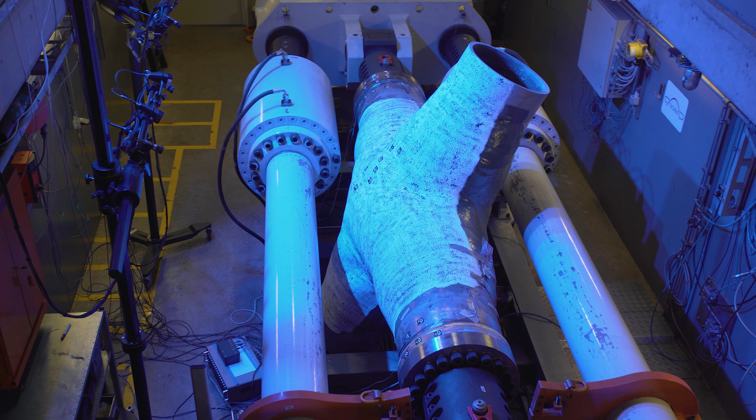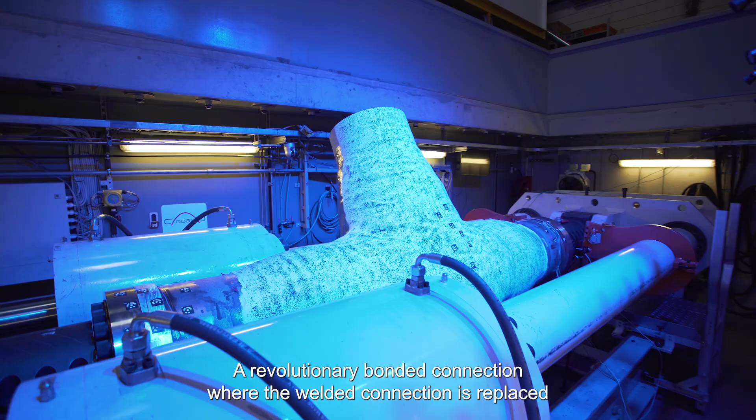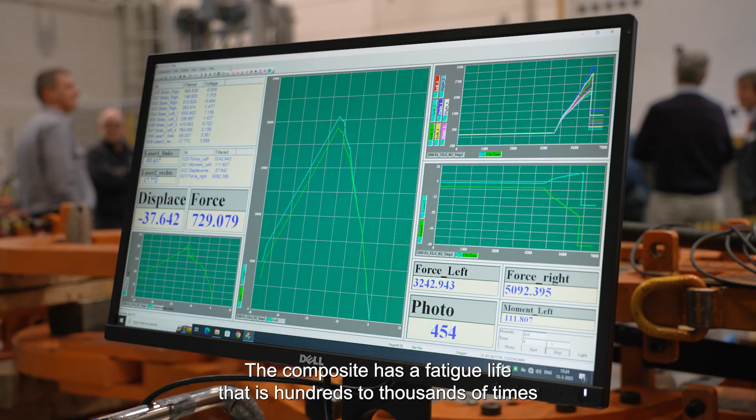The WrapNode is the next big innovation when it comes to offshore wind, solar and ocean energy structures. A revolutionary bonded connection where the welded connection is replaced by wrapping flexible and durable composite material around steel tubes. The composite has a fatigue life that is hundreds to thousands of times longer than steel equivalents. It will accelerate the construction process of tubular structures, like offshore wind turbine foundations, thereby helping to speed up the energy transition.

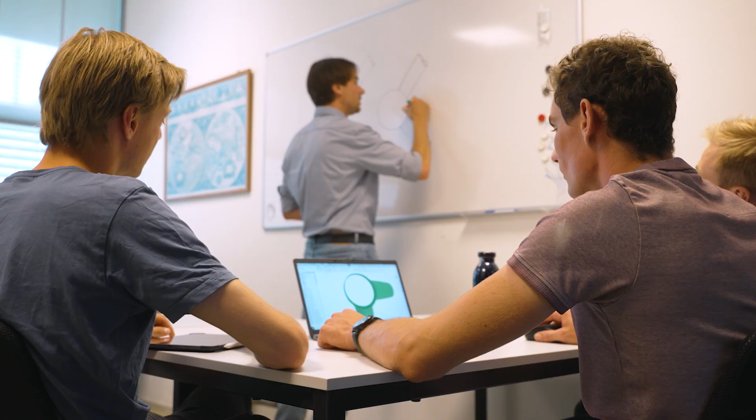In this video, the researchers and engineers on our team would like to tell their stories, from the conception of the idea to the development and extensive testing of this joining technology, and of course the progress of the WrapNode and how it will evolve from this point on.

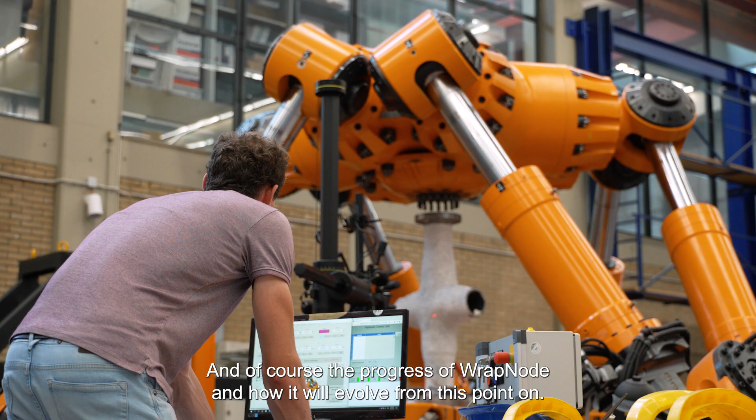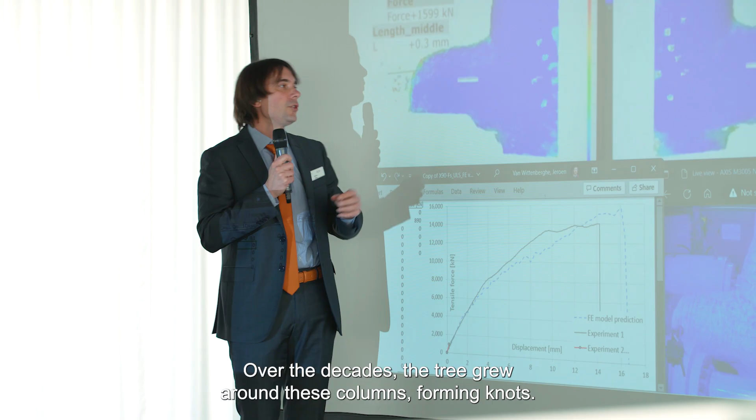The inspiration for the WrapNode comes from Belgrade, a beautiful town where I spent many years. There is one large tree with very long branches, which people have supported with steel columns to help it grow even further. Over the decades, the tree grew around these columns, forming knots, a natural connection between the branches and the steel tubes.

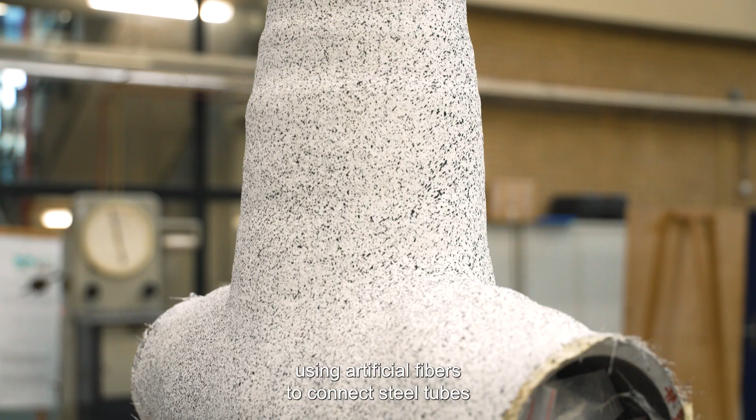The tree did this in the most optimal shape, leading to smooth transfer of stresses. Since a tree is made of natural fibers, the idea came to me to create a similar connection using artificial fibers to connect steel tubes in huge man-made structures.

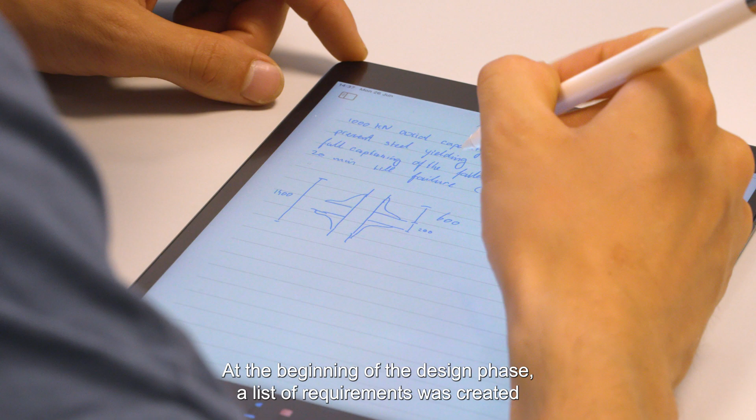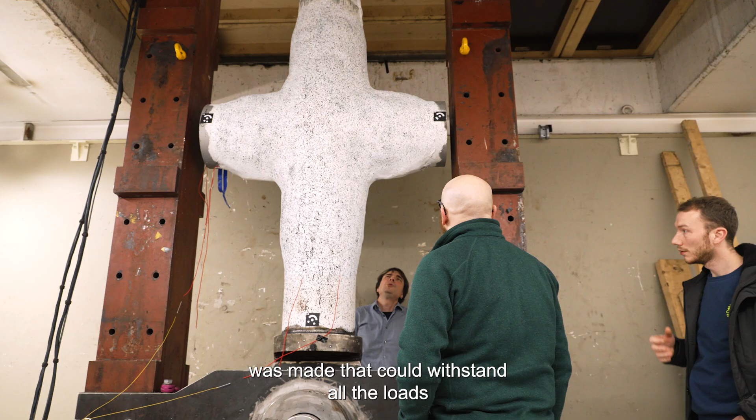So we started designing a WrapNode that can connect steel tubes in a structure supporting a wind turbine offshore. At the beginning of the design phase, a list of requirements was created, describing things like water depth, turbine type and environmental conditions. In an iterative process, a design of the structure and joints was made that could withstand all the loads and meet the requirements of an operational wind turbine.

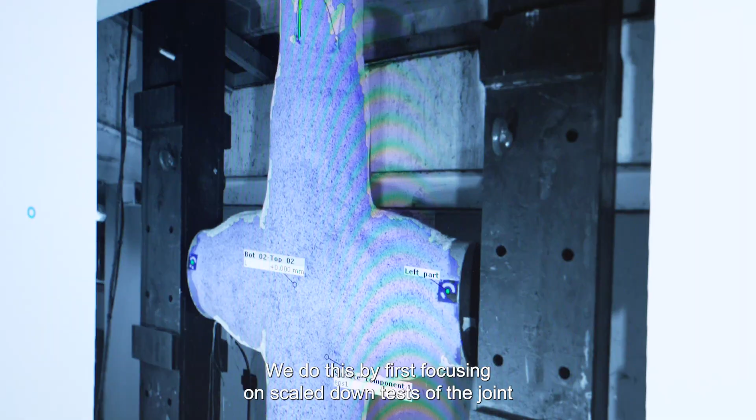We of course want to validate the performance of our design. We do this by first focusing on scaled-down tests of the joint and using these results to calibrate our models. The validated models will become an efficient and powerful tool to simulate the joint behavior, allowing us to predict the performance of other geometries, orientations and dimensions for the WrapNodes.

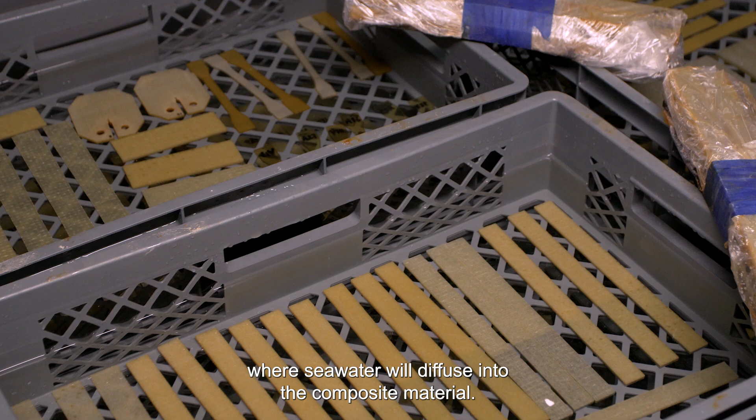The WrapNodes must withstand offshore environmental conditions, where seawater will diffuse into the composite material. The presence of moisture degrades the material and the steel composite bonded interface. In addition, temperature changes will affect the mechanical behavior of the material and must also be considered in the design of the structure.

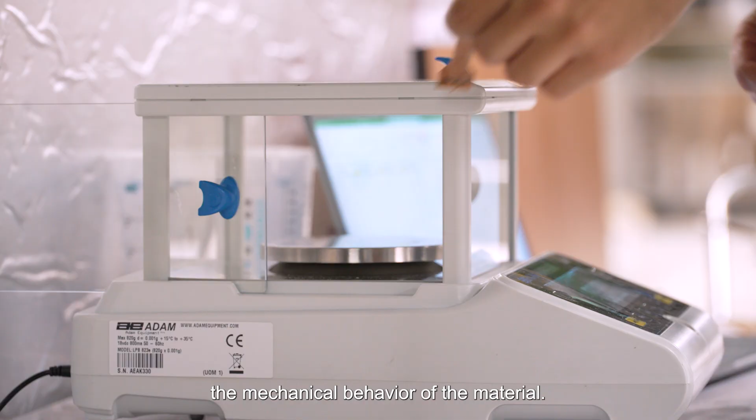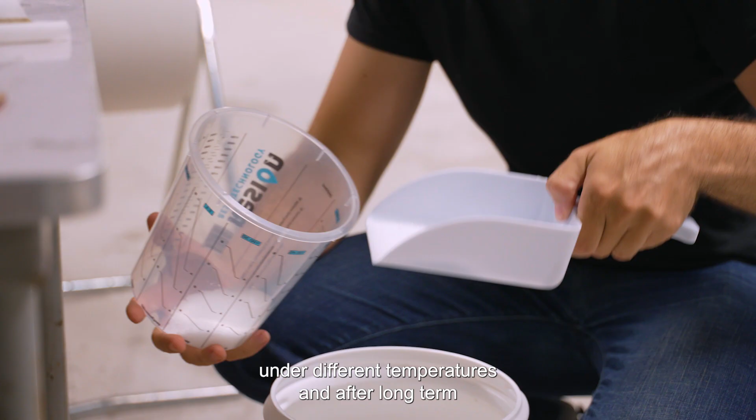For this reason, tests are performed on material and bonding samples under different temperatures and after long-term immersion in salt water. Experimental results are modeled into computational tools to consider the effect of environmental parameters on the performance of the structure.

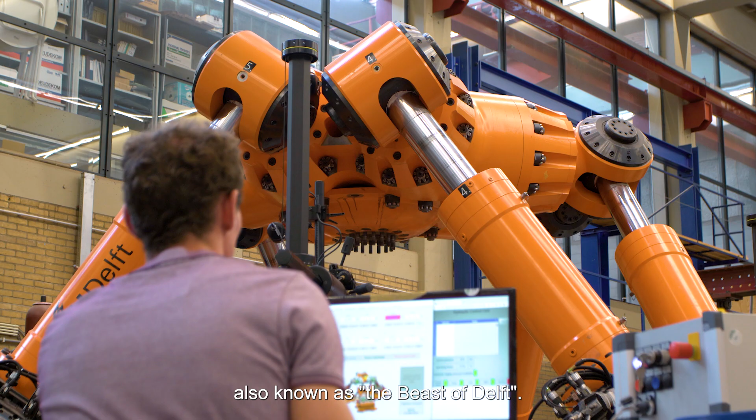WrapNodes come in different forms of geometrical and load complexities. To understand this, we look into complex and simple geometries. Simple geometries, X-joints in different load directions and combinations, are tested in the hexapod, also known as the Beast of Delft. By performing all those experiments, we want to establish a solid understanding of the joint behavior and prediction models when the WrapNode is subject to multi-axial load conditions.

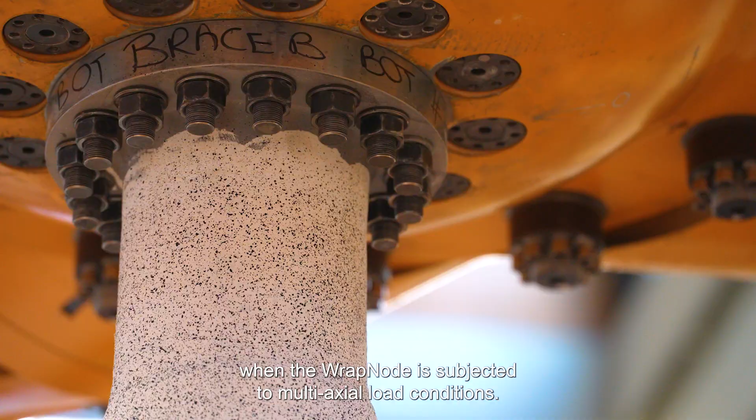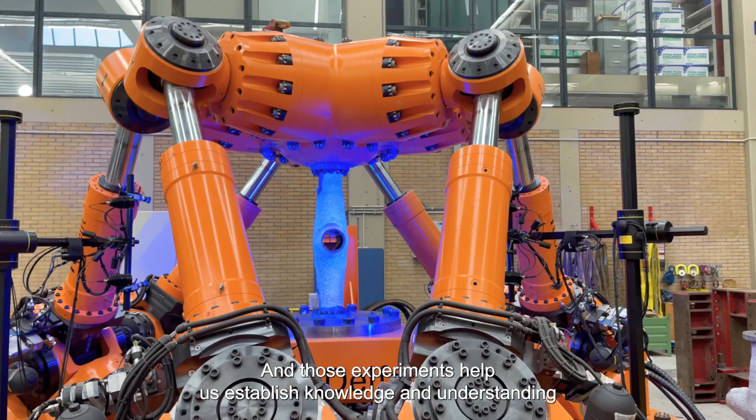We are also looking into complex geometries by testing KK joints. Those joints connect the diagonals with the leg in the supporting structure. Those experiments help us establish knowledge and understanding to develop prediction models that can quantify the static and cyclic resistance of the WrapNode.

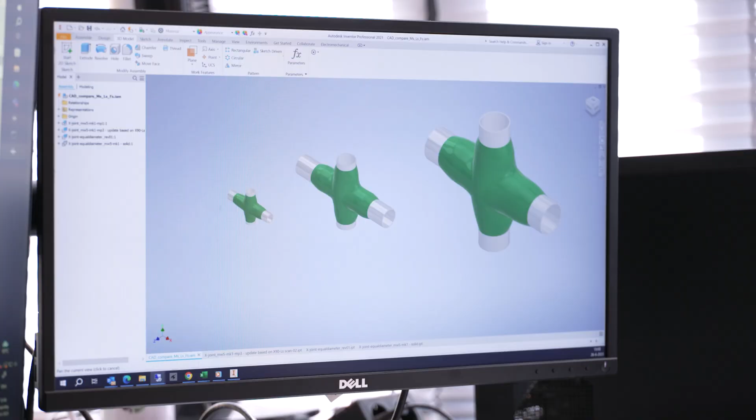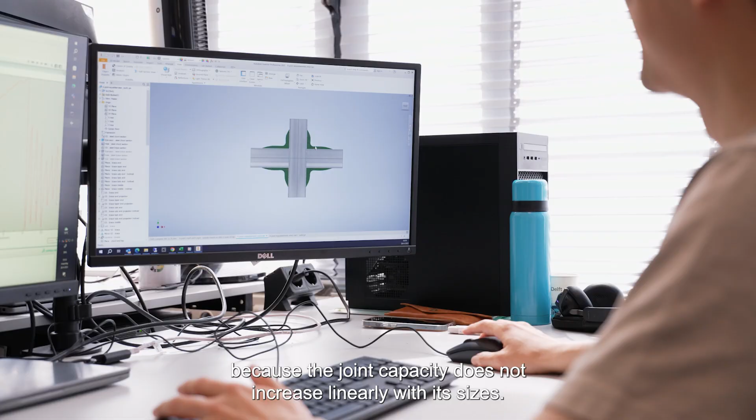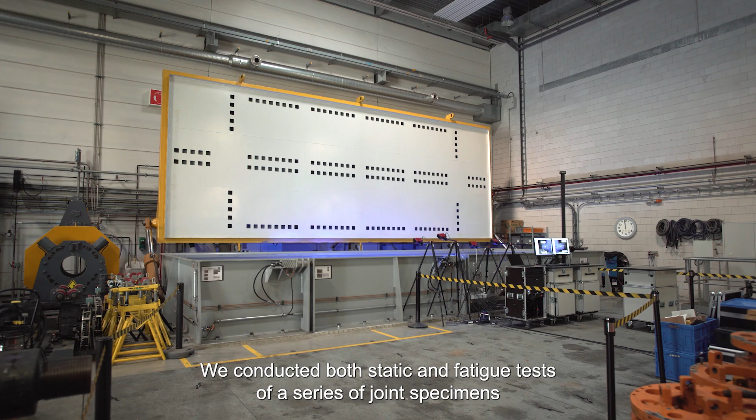To understand how WrapNodes behave and perform in field applications, we need to consider dimensional size effects. The size effects are important for practical design because the joint capacity does not increase linearly with its size, similar to an adult elephant having more relative bone mass compared to an infant elephant. We conducted both static and fatigue tests of a series of joint specimens to investigate such size effects.

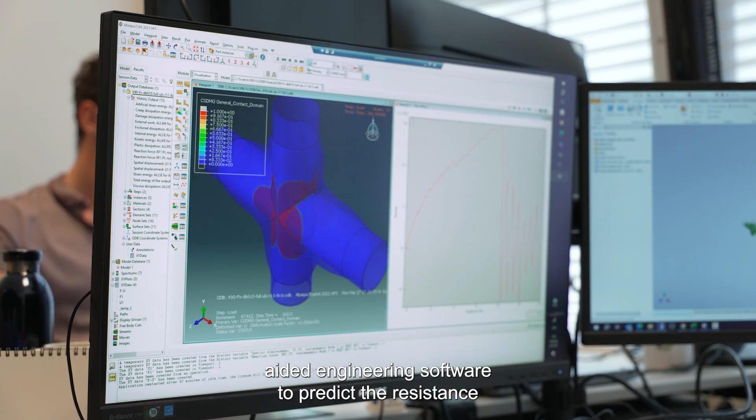The tests enabled us to build up and develop reliable models in computer-aided engineering software to predict the resistance of joints in the design. The tests also showed that the real-size joint has superior static capacity and fatigue resistance compared to traditional welded steel joints.

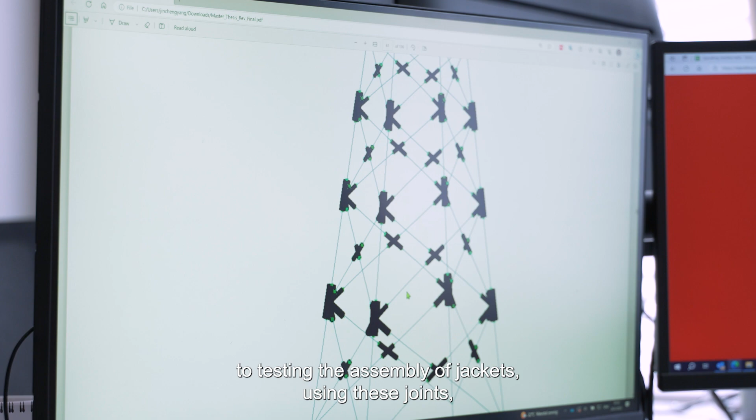In the future, the focus of WrapNode will move from the composite joints to testing the assembly of jackets using these joints, validating the performance of these jackets, and finalizing the prediction model by expanding the dataset of test results with more joint geometries and load scenarios.

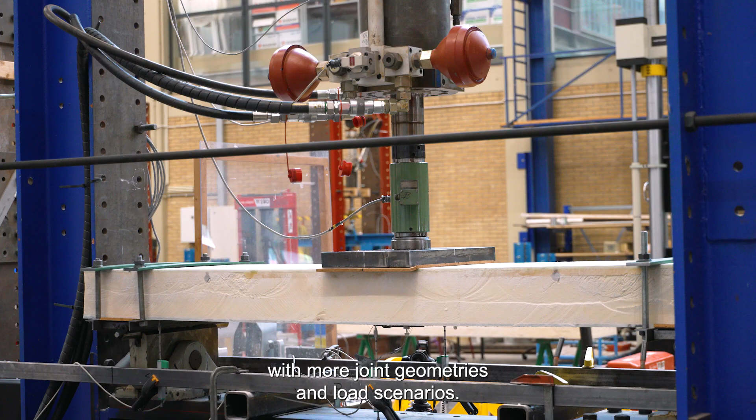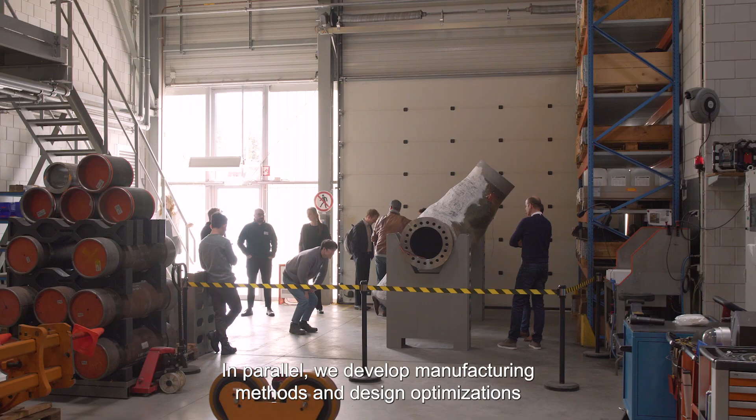Within the WrapNode project, we aim to collect all required information to validate prediction models in order to use these joints in offshore structures. In parallel, we develop manufacturing methods and design optimizations in order to scale up in line with the energy transition demands.